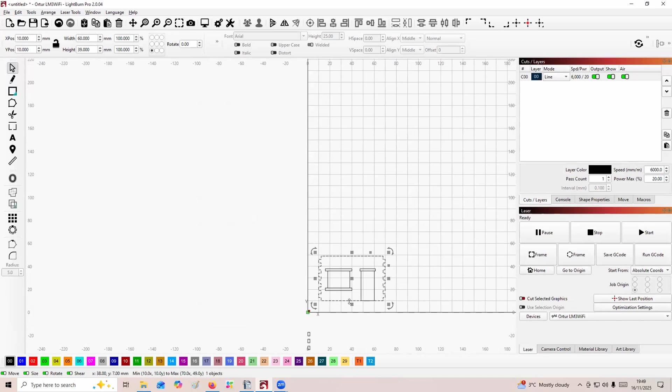I think one thing that you want to do is get used to saving your work. I've got this on automatic save, but I also save it again myself. So at the moment we've done the wall, so it's Control D, makes a duplicate of what I've got highlighted. And there's the wall. Now if I select all of it and Control D, I've got the front wall.

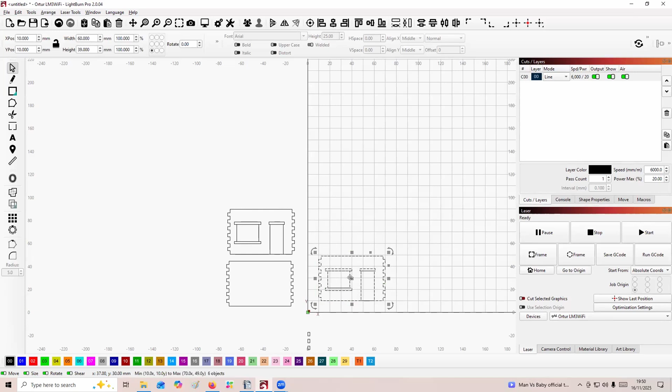Now, obviously, things that are on the workspace will get worked with the laser. Anything that's off the workspace won't. So I'm going to take this off the wall completely at the moment. So we've got a brand new sheet. What we want to do is make bricks.

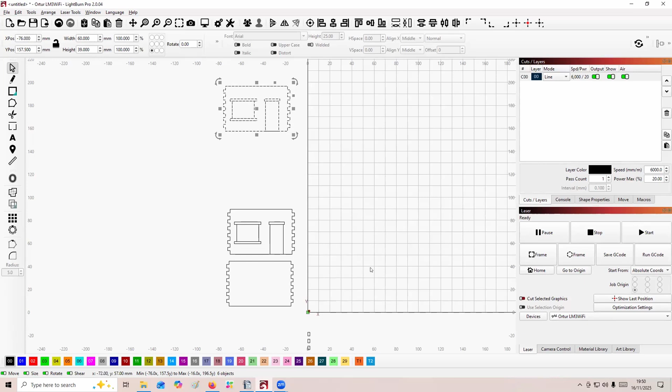Now, there's a lot of talk about the size of a brick, a British brick. And from what I can gather, for an 00 size brick, a brick with a mortar layer all the way around it should be 3 millimeters by 1.5 millimeters, roughly. And at that scale, I don't suppose anybody's going to worry too much about it anyway, or shouldn't do. So what we do is we'll create a brick.

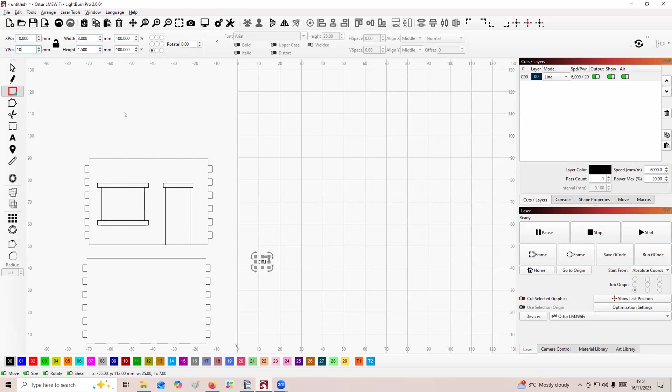Now, what we'll do is with this, we'll create a rectangle, which is 3 by 1.5. And we'll move it to 10, 10. And if we always use that 10, 10 as a starting place, you know exactly where things are going to be later on. Okay, now to make this a bit easier to follow, I'm going to move this to layer 5. That's just arbitrary. It can be any layer you like, doesn't matter.

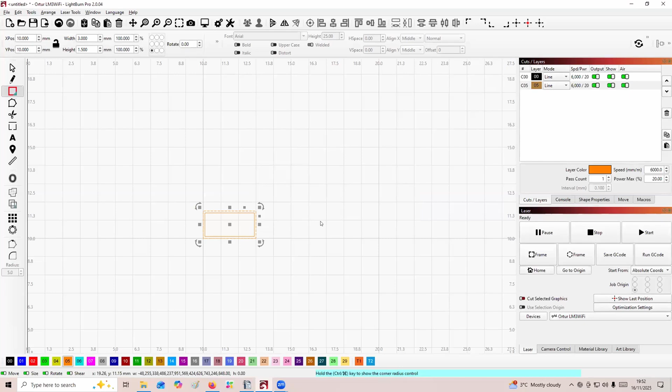That's the outline of the brick with the mortar. We want to create the brick itself. So if we go to offset, and we'll put a distance of 0.1 and inwards, just click OK, and it's made another rectangle within the first rectangle. If we highlight that rectangle and go down to radius here and pick 0.1 of a millimeter, I would think, and just click on each corner. And it rounds off the corners of the brick, which looks quite good when you've done a whole wall of these.

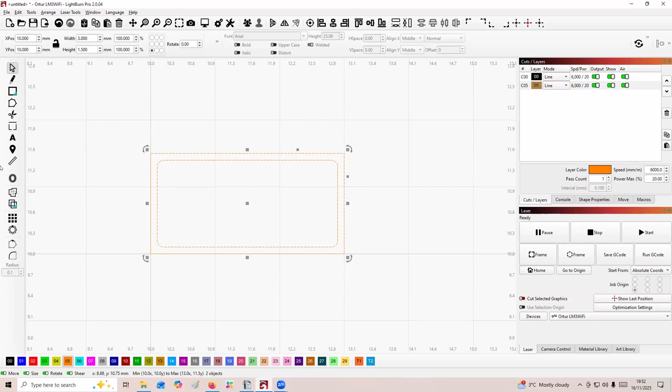Okay. Now, if we click on both rectangles, what we want to do is make an array of these. And if we click on array, the settings that we want are 2 columns in the X, 2 rows of Y. And we want the X spacing to be 0. And we want the Y spacing to be 0.

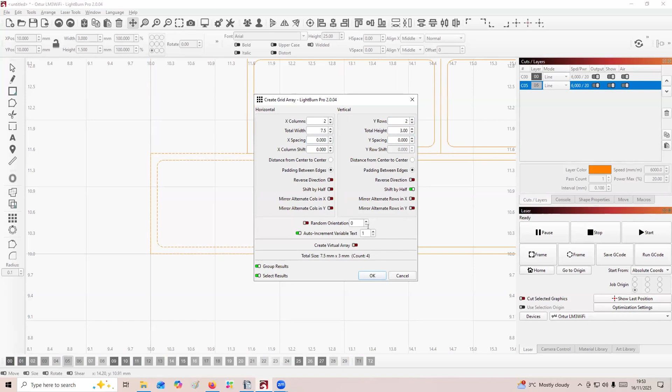Now, at the moment, they're just 4 blocks, one on top of the other. We need to shift them by half to give us a half brick. So we click shift by half, click OK. And you can see that it has now given us 2 rows, 2 of each, offset by half a brick. I haven't worked out yet how to do the English bonding, I think it's called, but I will do.

Now what we want to do is create another rectangle. We'll start it at the top corner here, and we'll make it 3 by 3. Oops. And we'll shift it to 10, 10. No, sorry, 10 by there. So we want it 11.5 by 10.

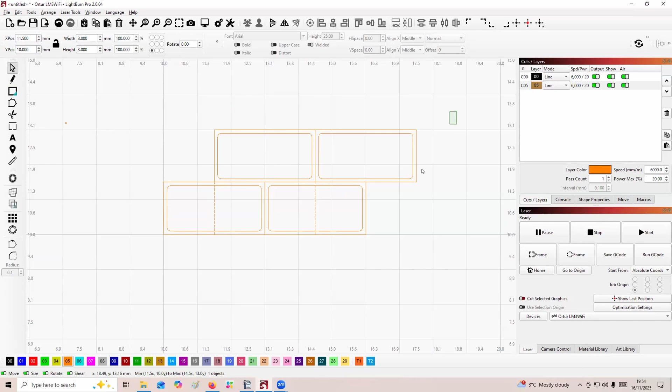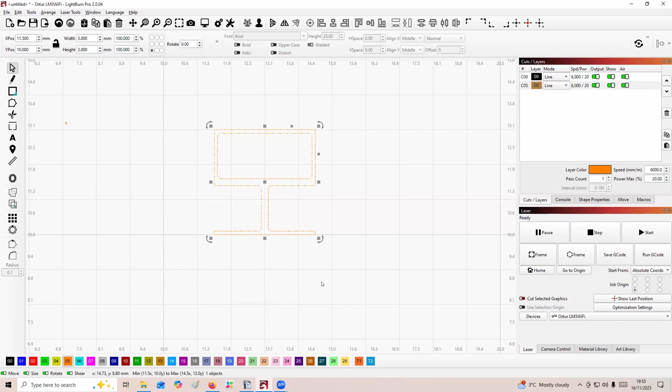Okay, now if we select both of these two drawings, the bricks and the square, what we want to do now is to get rid of the half bricks we don't need. And to do that, we just select Control B again, and you can see if we move over the different subtracts that they do different things. And you can see by intersection, it gives us a full brick with mortar all the way around it and two half bricks with mortar on the inside. Okay. So what I do with that is Control D, save it off the screen. So I've got that for later on if I need it.

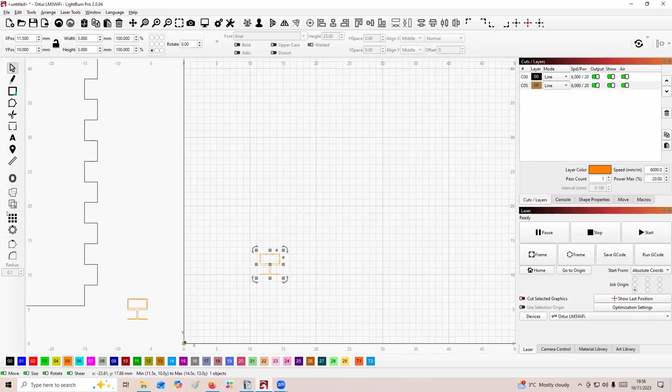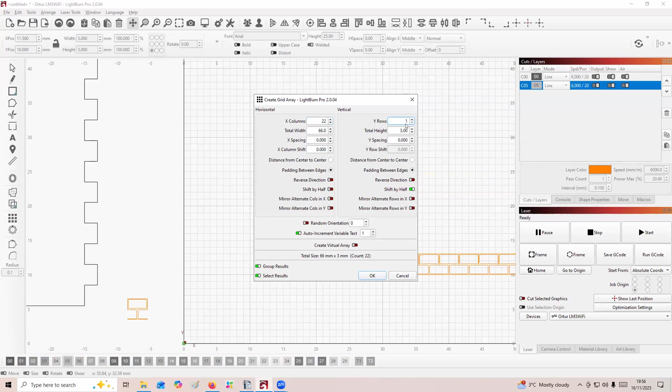Now, what we want to do is make an array of bricks that are going to fit our wall. So we select all of that, go to Array, and we want 22 columns with no spacing. Well, 2. And for the vertical, we want 14 rows. And no spacing. And this time we want the shift by half off because we've created the half brick. Click it off and you can see the image behind changed, and we have a wall of bricks. Okay.

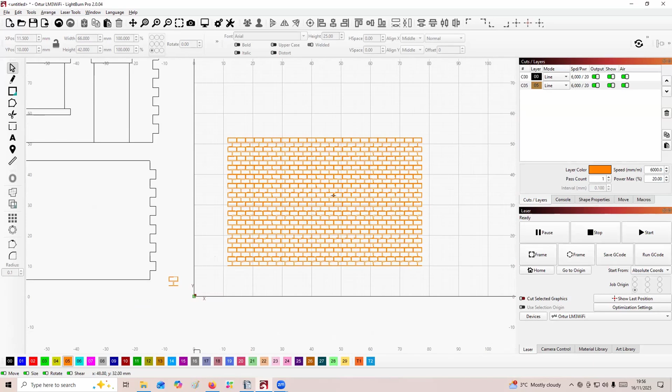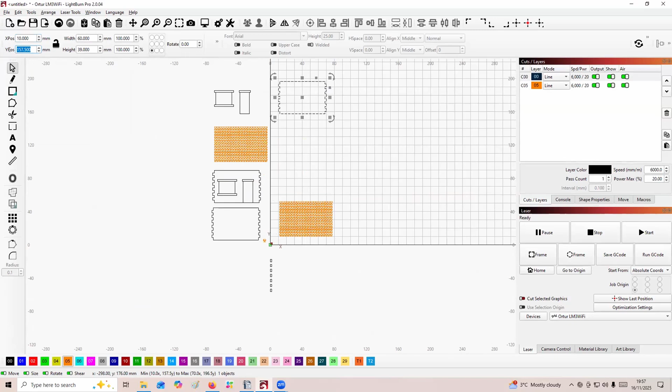Once again, I highlight it, Control D, save it off the screen. Now what I want to do is place the wall and the bricks together. So highlight the wall, and because we've been using this 10 by 10, if we do 10, 10, it's put the wall exactly in the right place on the bricks. And of course, it makes me a liar because I didn't do the bricks today. So if we highlight the bricks and we move that to 10, 10. So now the wall is over the top. There is a little bit over on this side. We're not worried about that.

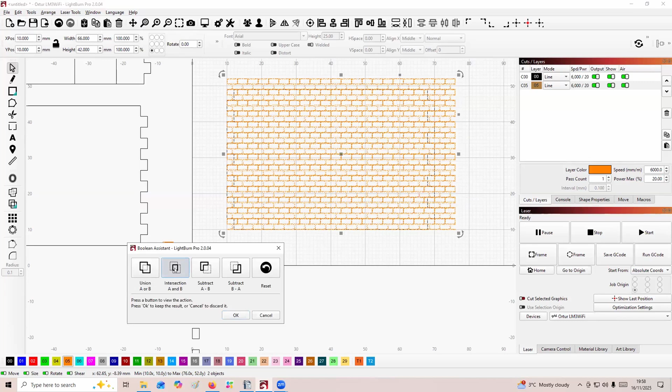So what we want to do now is cut the holes out for the doors, the sills, and the rest of it. So if we highlight both, Control B, oh, sorry, no, not this time. Yes, it is. Control B, and intersect A and B. I couldn't have highlighted them properly. That's not working for some reason. What have I done wrong?

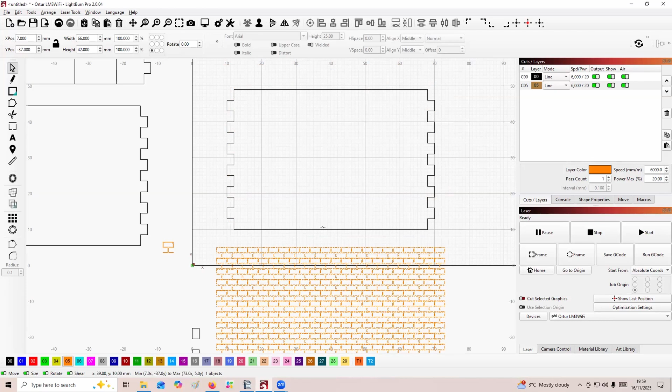Oh, I know what I've done wrong. You can see there's no windows, doors. It is doing the right thing. Silly. So delete that. See, it's left the door and window up here. I put them in the wrong place.

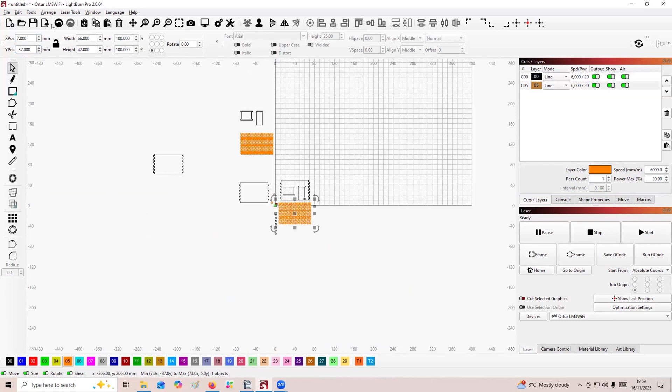As soon as they're out of the way, select that, group it, and then move it to 10, 10. It's got the door and the windows there now. And if we move this to 10, 10, okay. So now if we highlight both, Control B, intersect, and it cuts out the whole of the first frame for you. So you've got just the bricks, no lintels, no doors, no windows in it.

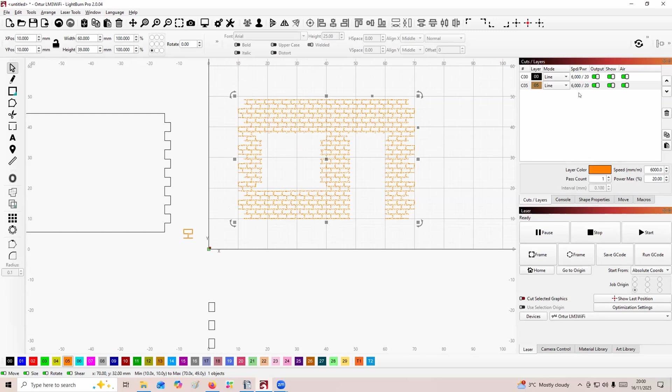And what we want to do now is change that layer to a fill so that instead of being a line, it's a fill. And you can see that it's going to put in the mortar for you. So it leaves the mortar out as it works.